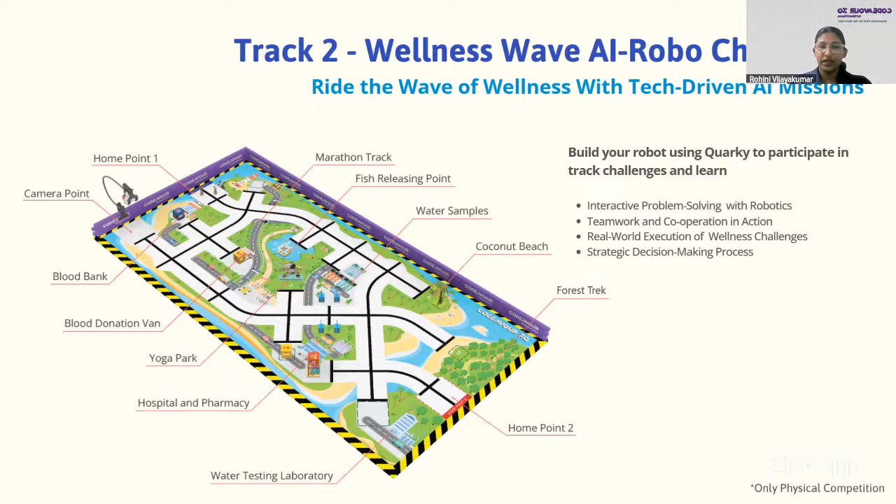So there are already predefined or preset 8 challenges the kids need to solve here. The robot needs to be created or built to solve all these challenges. Let's have a deep look into it.

You can see it over here in the arena - home point 1 and home point 2 marked over here. You can choose either home point 1 or home point 2 to start your project. We also provided this camera point to do some AI projects. Then here we marked the challenges - you can see starting from 1 to 8, challenges are provided.

First challenge is the yoga challenge, then there is mosquito prevention, then there is water hydration. We'll have a deep look into each and everything, and let's see how the kid needs to create their robot and how they can solve it during the track.

So starting with the first challenge, the yoga. In this posture, there will be a challenge placed on number 1, where the robot needs to be used to change the yoga position. For example, now this yoga posture is in warrior pose, so we need to convert the warrior pose into a triangle pose by using the robot. That is the first challenge a kid needs to solve here. This yoga challenge will restore the balance and encourage a healthy lifestyle, and the kids need to use the robot for it.

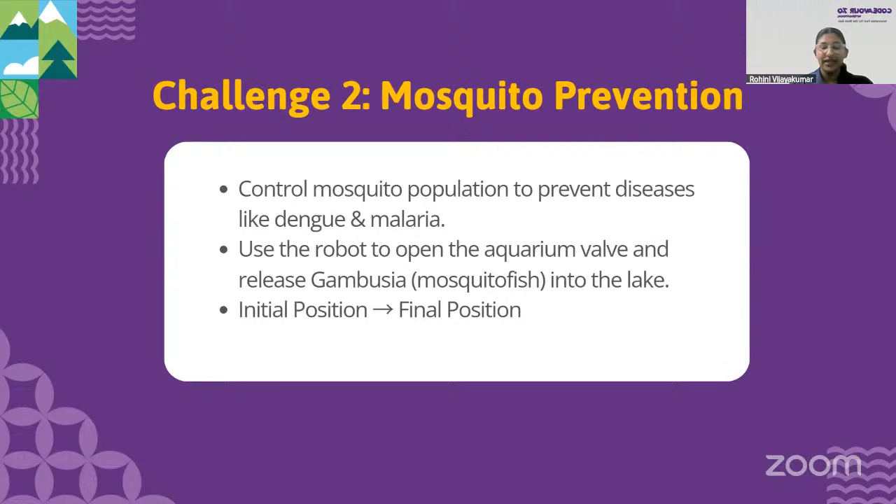The fish will eat the mosquito eggs and help control the mosquito population. The initial position is like this, and you need to place your robot on this path, tackle the extension provided, and release the fishes into the pond.

One important thing to keep in mind is you need to release both fishes. If you only release one fish partially, you only get half the score. This applies in both manual and autonomous modes, you only get half score. You can see it in the picture here.

If you want to note down the points, you can do so. This was the partial condition, and this was the full condition. In this picture, both fishes are released, so you got 20 points in manual and 40 points in autonomous.

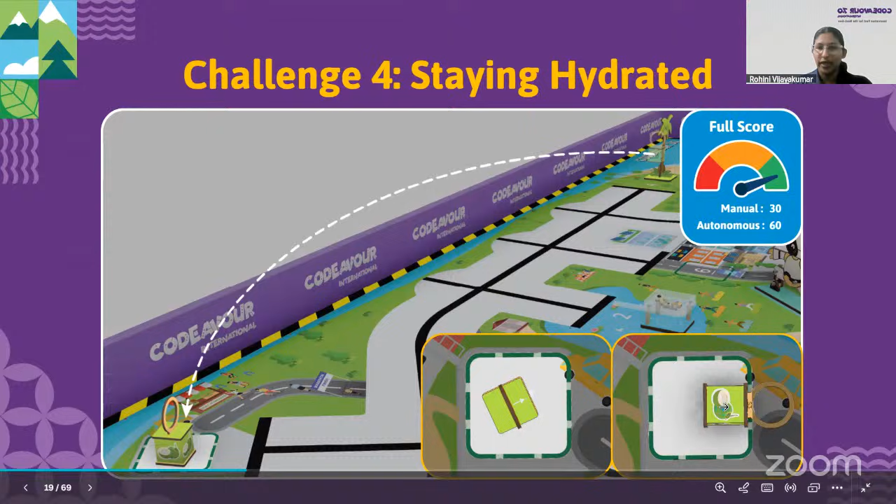In this case also make sure that you are placing it properly within the box itself. You need to collect the coconut from the tree and deliver it into the refreshment stalls near the finishing line. You can see it over here - this is where you are going to place your coconut, and also make sure that it is placed within the square boxes itself. So that was our challenge 4.

Then coming to challenge 5, it is snake bite rescue. So over here what we need to do is we need to get the medicines from the pharmacy and give it to the forest area. For example, this is the pharmacy - you can see two sets of boxes placed over here. The first one, this red one, is the snake bite rescue medicine. So what you need to do is take the antivenom from there and deliver it to the forest area.

Your robot needs to come down here to the pharmacy and collect, or pick and place, the antivenom or the medicine and take it into the forest area. So this is where you are supposed to be collecting the antivenom. This is the area where the pharmacy is, and after collecting it, going this way back to the forest.

So I hope it's clear, and always make sure that you're aligning or positioning your cube boxes, or the boxes you are using, perfectly inside the square boxes provided.

So the next challenge also requires you to take it from the pharmacy. It is the vaccination. Over here you can see there were two sets of medicines provided in that pharmacy - the first one was the snake bite antivenom, and the second one is the vaccination. So you're going to need to take the vaccination from here and drop it in the residential area. This is where the vaccination or the pharmacy was, and your robot needs to come all this way and drop it on this particular box provided in the residential area.

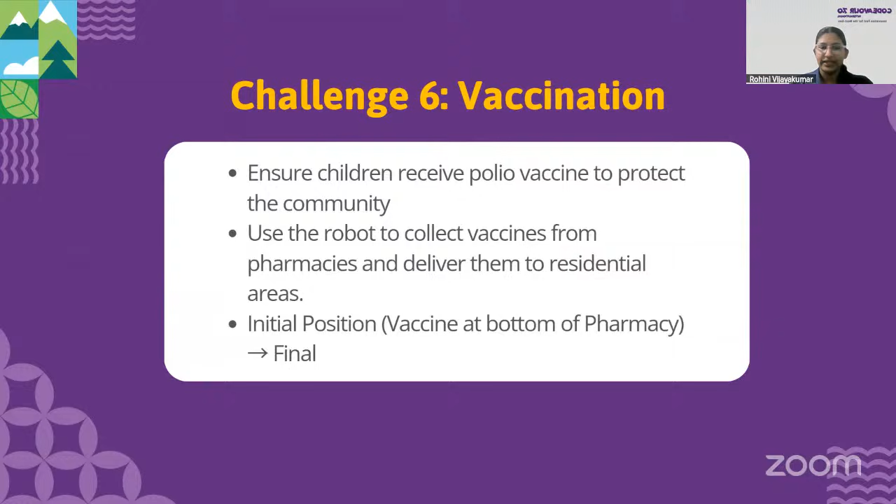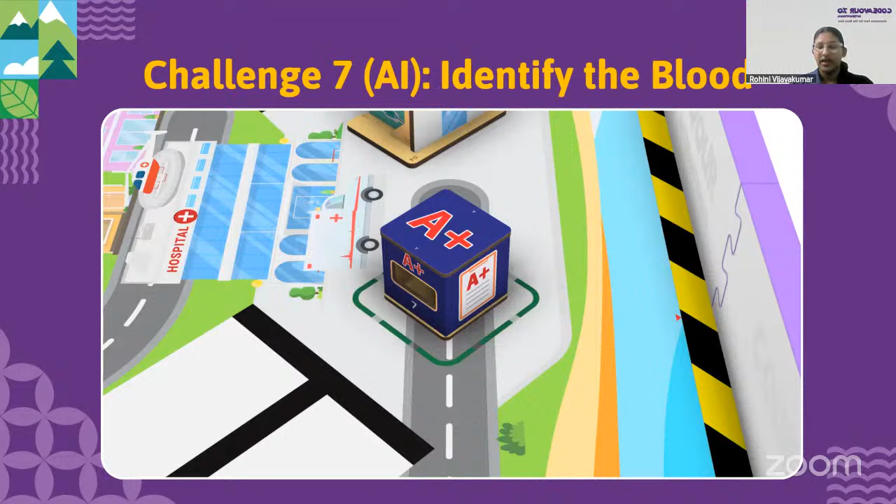So the next one is the AI project. The AI challenge we have in track 2, where the kids need to work on collecting the blood bank report. They need to collect that particular blood report and put it into the camera point, analyze which type of blood they need to use, and give it back to the hospital - collecting it from the blood bank and giving it back to the hospital.

So for that step, first there will be two different sets for junior, senior and elementary. For elementary, they need to use recognition cards to train the model, whereas for the junior and senior, they need to use machine learning to develop the code or train the model.

For the elementary, it will be recognition cards 1 and 2. For the junior and senior, they need to train their robot using the machine learning environment. So that is the criteria, and you need to note it down in challenge 7.

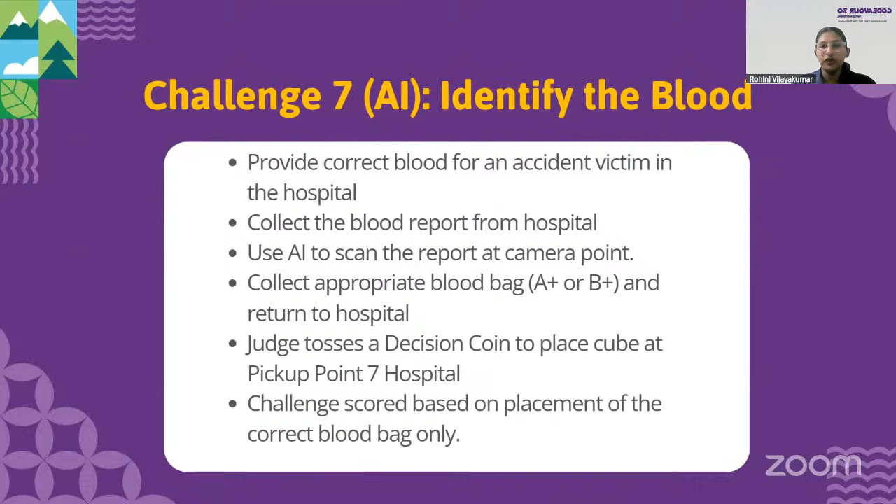The procedure is simple: the referee will toss a coin. For junior and senior, it will be written as positive A or positive B, and for elementary it will be 1 and 2. So they will choose which cube needs to be placed in the hospital. That is the report you need to collect from the hospital. Once it's collected, you put it into the camera point to analyze it, and from there you get the report of which blood you need to use.

So you need to go to the blood bank, take the blood, and put it back to the hospital. That is the challenge. Here you collect the blood and return it to the hospital. That's the process you need to do in challenge 7, identifying the blood.

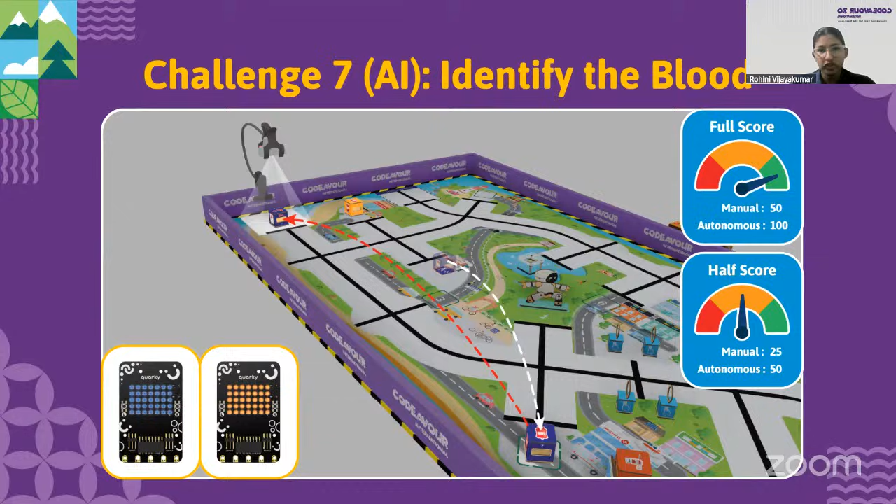Keep this in mind: elementary students are going to train it using the recognition card, whereas senior and junior are going to use the ML environment to do the coding. I hope it's clear. Then the next challenge is challenge 8, testing the water.

What we need to do is take all these water cubes and put them into the water testing lab. For example, we need to make sure the water is drinking water and not contaminated with any illness. So the robot needs to go to the residential area and collect all the water samples from there. You can see these are the 4 samples they need to collect from the residential area, and they need to put it back to the water testing lab.

So these are the challenges coming. You can see the picture here—this is where the residential area was placed. The robot needs to collect all these 4 samples and place them back to the water testing area. I hope the challenges are clear for you.

The first one was changing the yoga posture. Then mosquito prevention. Then the kids need to work on the traffic cones and provide the support. Then the snake anti-venom, transferring it from the pharmacy to the forest. Then the pharmacy, where the kids provide vaccination from the pharmacy to the residential area. Then the AI challenge, where the blood type is determined. Then challenge 8, testing the water, where samples are collected and put back to the water testing lab. So these are the 8 challenges we need to tackle using the robot we built.

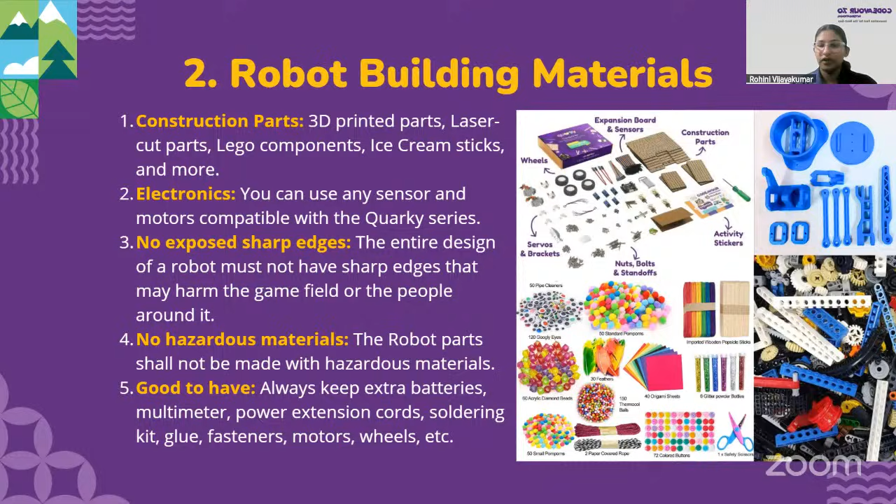And all the pictures provided over here, you can use them in your robot.

Let's start a look at how you can do the coding. So over here I was talking about the autonomous robot. For the manual robot, you can do it in the block coding and control it with the up arrow, down arrow, left arrow keys. That was very easy.

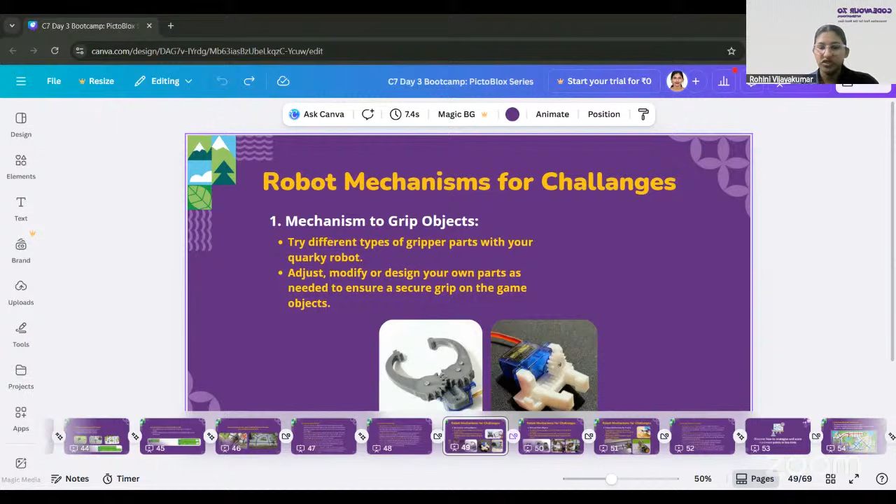These are the tips and blocks you'll use while creating this program in track 2. You definitely need to use parts like pick and place, so you can take an object from one place and put it somewhere else. For example, to complete the hydrating challenge, you need to take the object from the coconut tree and put it into the other area, so you need to add code for that. Next, let's look at how this pick and drop method works.

For that, you can add these mechanisms, shown in the images on the PPT. We have this mechanism to grip the object - you can grab it using servo motors, or a 360-degree servo can also be used. We already have gripper robots in our Quarky kit, so you can use the same method here. It will be able to take your object - for example, if you wanted to take the traffic cones, this gripper method will be helpful.

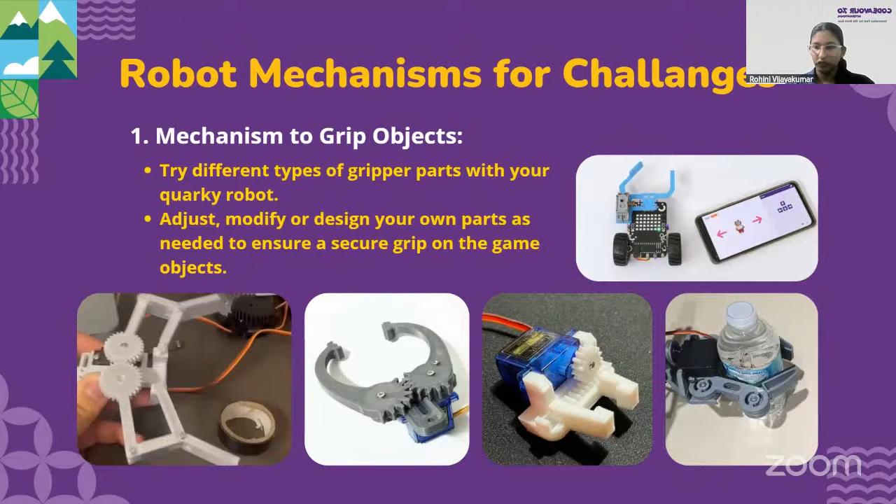The next one is the pick and place object. We already have green plastic parts in our Quarky kit - you can utilize the same and connect it to your robot, and it will help with the pick and place purpose for vaccination and the snake venom.

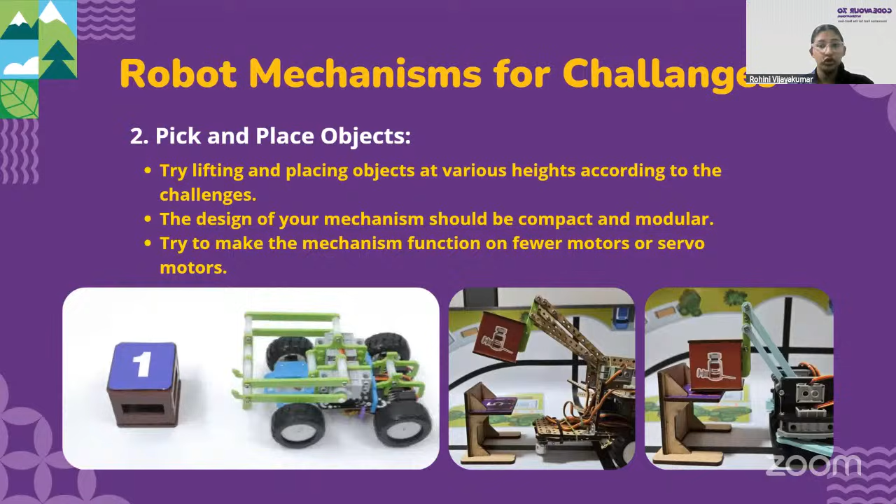We also have this water testing module, so you need to grab all four of those if you want to add that. For the water challenge, someone asked in the chat window whether we need to take it in a single time.

That is not necessary, but you can see in this particular video they made a design to take all four water drops in a single time, in a single way - controlling and grabbing all four waters. That can also be added.

This criteria is not mandatory - you can only use pick and place or a gripper. You can also make your own unique mechanism, but make sure you are not using any sharp or edgy object.

Let me just play this video once again so you can have a quick view. On this robot, it's taking all four water drops in a single time, in a single way, so we don't have to come back again and again to collect one by one.

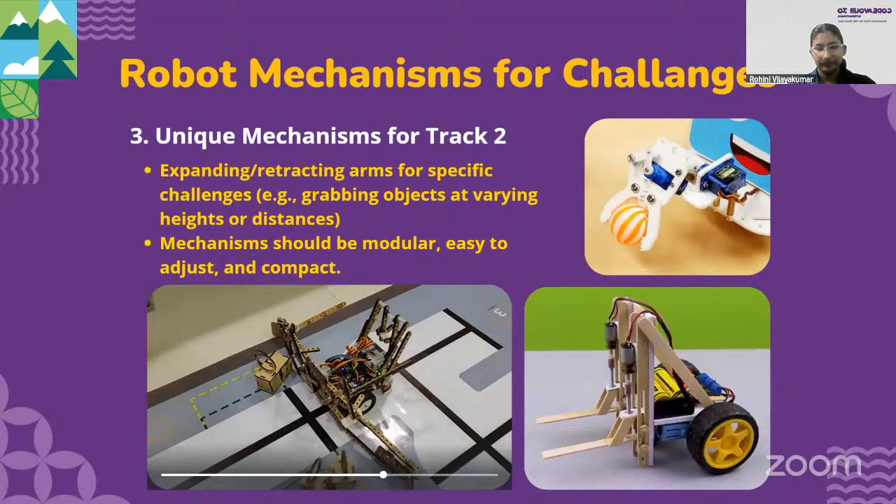Let's discuss more about the mechanism part. Always make sure your robot's weight is balanced. If your robot is very lightweight, it's going to affect the pick and place purpose, and if the cube is a little higher in weight, it will also affect your pick and place activities. Your robot weight can go up to a limit of 1 kg. You can add some weight parts in the middle to distribute the weight equally to all parts. If you want to create other mechanisms, make sure the parts are coming within the size of the robot - if your robot size goes beyond 20x20x20, it's going to affect your participation.

Also add smooth and secure gripping. Once you take it, it's very easy, but on the way to the next drop point, if you are not able to grip it properly, it's going to drop somewhere, and you'll lose time.

Also control the mechanism speed and precision. While testing the mechanisms at school, prior to the event, do it properly with various scenarios - what happens if the block drops somewhere along the way, and how can it be picked back up. Do different trials with different scenarios so you understand more about how the robot will work in different situations.

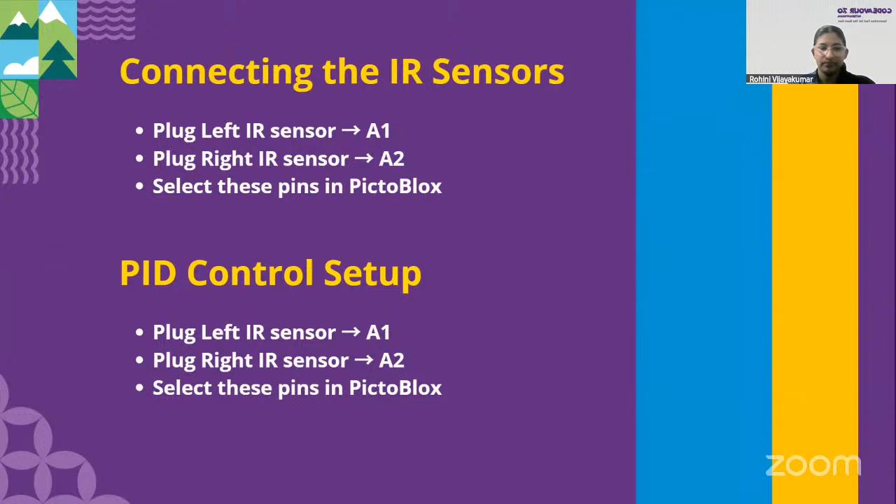So these were the PID values I was mentioning. We don't need to change the KP and KD values. If you wanted to control the speed, you can vary this base speed and minimum and maximum.

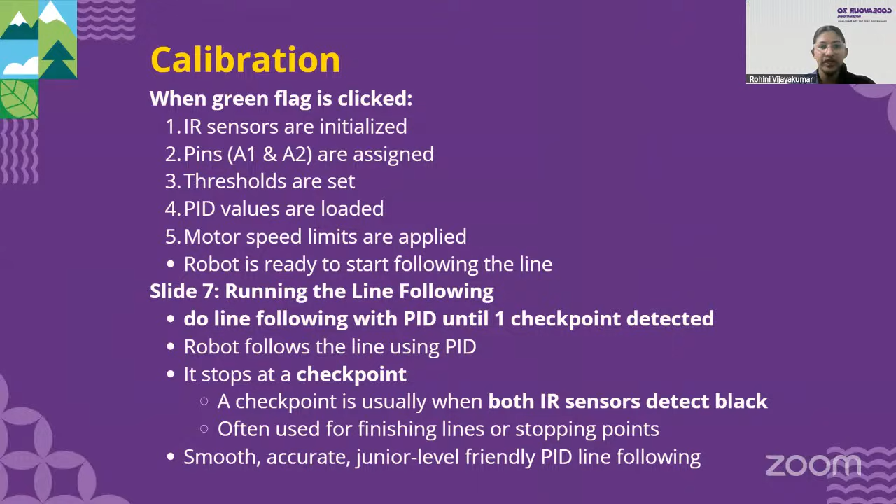Let me just show the code in PictoBlox. Once it's done, we can wrap up the section. So this was the code we were going to use. We will be going to initialize the IR sensors. Then I'm showing this example of using external IR sensors, so we need to assign the pins. Then we need to set the PID values. We need to add the particular PID values. Let me just share my screen.